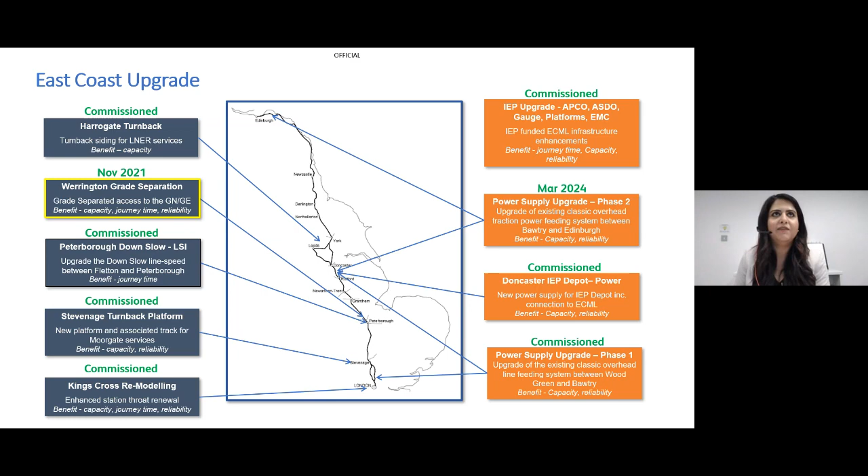Speaking about where Werrington sits within the industry, Werrington is one of the crucial schemes within the £1.2 billion East Coast Upgrade Programme. This programme also includes major schemes like King's Cross remodelling, Stevenage Turnback, and power supply upgrades on the East Coast. So the East Coast Upgrade is a major programme, and Werrington forms a crucial part of it.

Just quickly touching on what the East Coast Upgrade means in terms of outputs and outcomes for the stakeholders. So Werrington had a 9-day partial closure in January. We had a King's Cross partial closure until earlier this week, and then on Monday, King's Cross remodelling was successfully completed, with Werrington scheduled to complete in November 2021.

What that would mean as a service change for the next timetable change, as a benefit, would be 8 long-distance high-speed trains between King's Cross and Doncaster, 6 long-distance high-speed services between Doncaster and Newcastle, and the travel time between King's Cross and Edinburgh for the fastest service would be 4 hours, and between King's Cross and Leeds would be 2 hours. So lots of benefits within the East Coast Upgrade Programme itself.

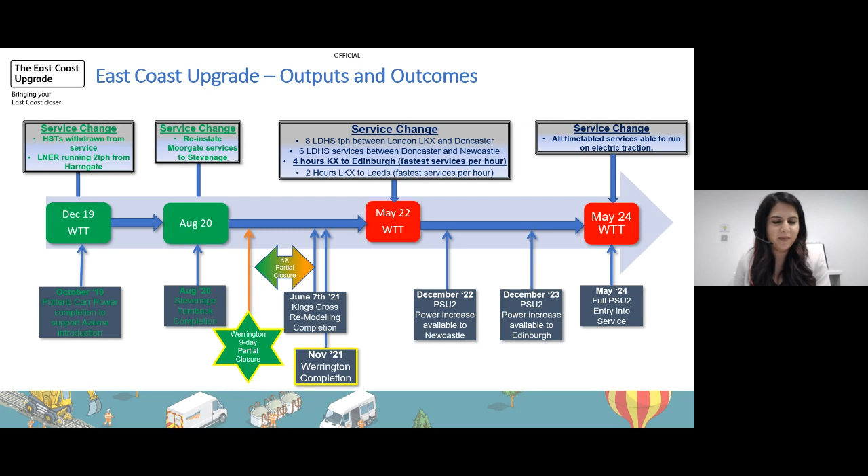If we go back to the delivery model of Werrington, the delivery model was a hub and spoke model, and what that did was drive early contractor engagement into the early design stages of the project. This was quite fundamental for us in terms of delivering the programme to budget and to schedule, but also in delivering a solution which was crucial to minimise disruption to the operational railway.

We also pride ourselves on the excellent communication we've had with the community around the project. We had monthly drop-ins, newsletters - all of this obviously pre-COVID, and even throughout COVID we've maintained our communication. Morgan Sindall have held numerous talks for school careers fairs and local interest groups.

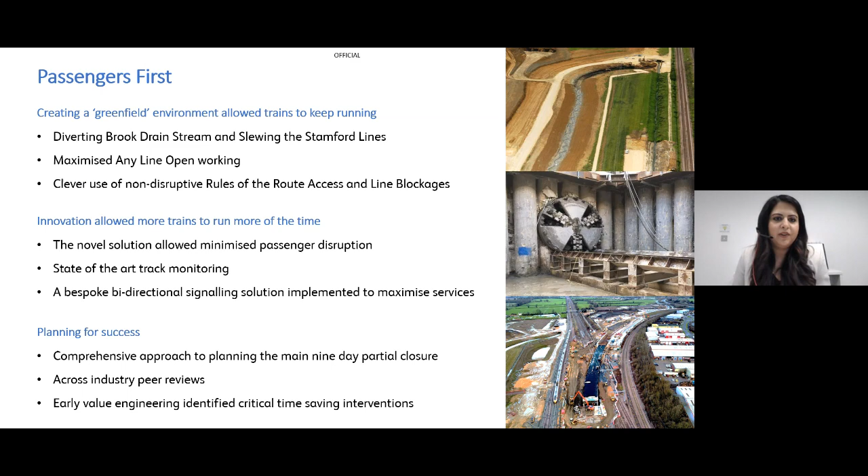In order to undertake this phase, we had to do a lot of enabling work. This bridge you see at the top is called Cock Lane Footbridge. We needed to replace an existing pedestrian footbridge with this to ensure the span was widened to allow for the new lines. We also diverted this river here, which created a biodiversity gain.

It created room for the wildlife to settle during storm surges, and we worked quite closely with the Environment Agency to ensure that this sat with their current plan.

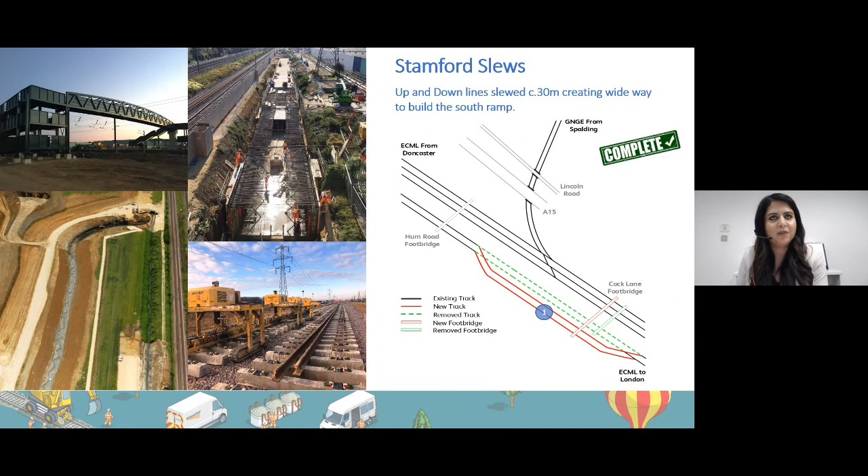Moving on to a few of the other enabling works. The north ramp was constructed by installing 183 bored piles and over 900 soil nails, finished with a sprayed concrete finish, as you can see in that image.

In total, 120,000 cubic meters of soil and clay was excavated to create this nearly a kilometre long ramp. The final fit out of this ramp is well underway and will soon be ready for track installation.

In the aerial photos, you can see a couple of bridges, so some utilities needed to be diverted. We installed a temporary footbridge to divert these utilities temporarily while we added a new span to the permanent footbridge, then diverted all the utilities onto the permanent footbridge.

And as of the weekend just gone, we've dismantled the temporary bridge, and the permanent Lincoln Road Bridge is up and running.

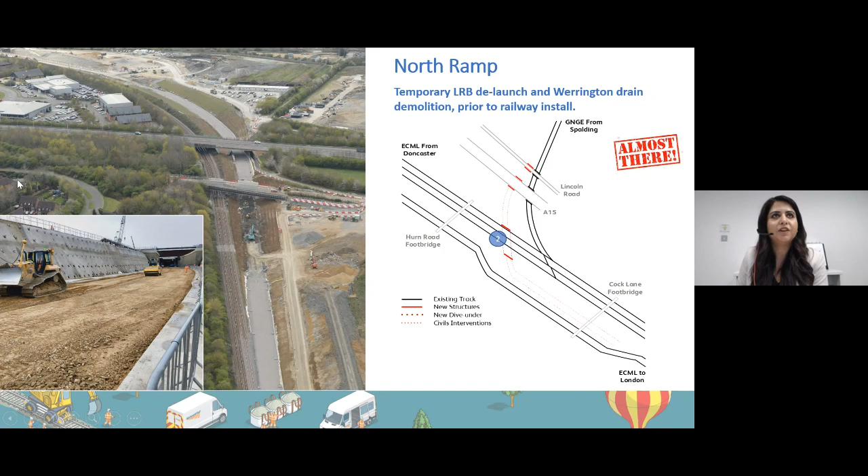Similar to the north ramp, over onto the south ramp, we created this wide way. As you can see, these lines are now slewed. We created this wide way to create this ramp. This is the bridge that I referred to earlier, and this ramp itself is also about 1 kilometre long.

It had 66 bored piles just for the reception pit itself, where the tunnels went, and 693 bored piles all the way through to the ramp, with some sheet piling here as well. So major enabling works were undertaken to ensure that the portal push would occur.

As you can see in this image, this is what the south ramp looks like - fresh bottom ballast, ready for track install.

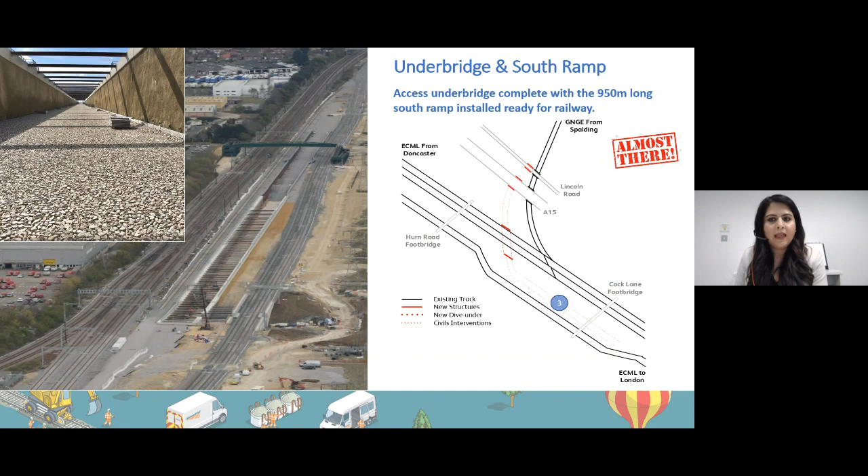And then we get to the 9-day partial closure. Before I pass it on to Brian, I'd like to quickly touch on the bi-directional signalling system that I mentioned earlier.

This photo does quite a lot of justice to what that meant, because this is where the portal is nearly in its final position. You've still got a long reach excavator undertaking those excavations, but you actually see an East Coast mainline train running, all due to the bi-directional signalling system that we installed. That was quite a success for the project.

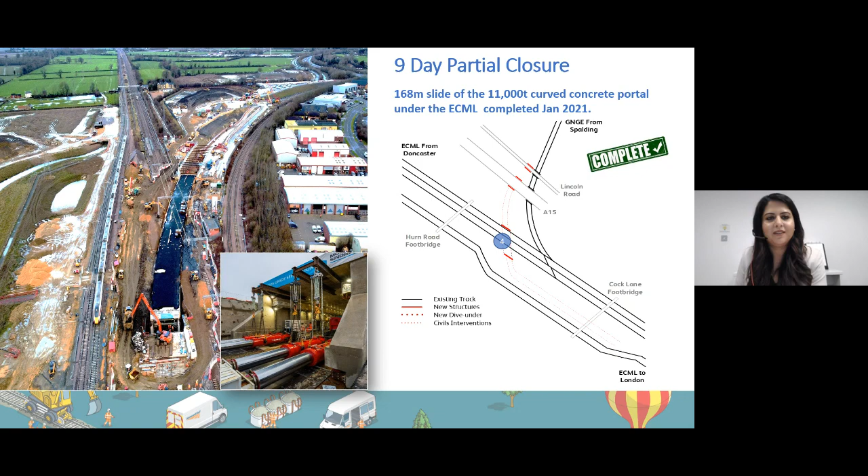I'll hand over to you, Brian, now to go through what the 9-day partial closure was all about.

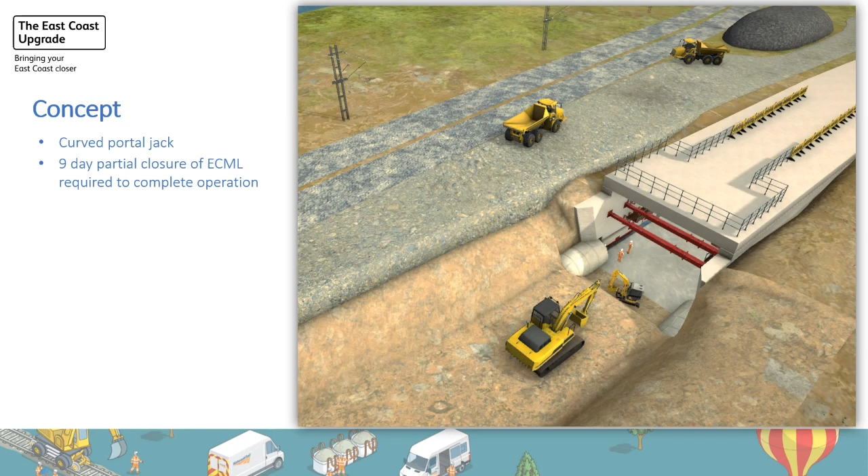It involved 2 guide tunnels, put in ahead while the East Coast Main Line was running, and a jacking slab was constructed on the launch side. A cutting head was put on the front of the portal, and we set up at the back with some jacking operations to push the portal through.

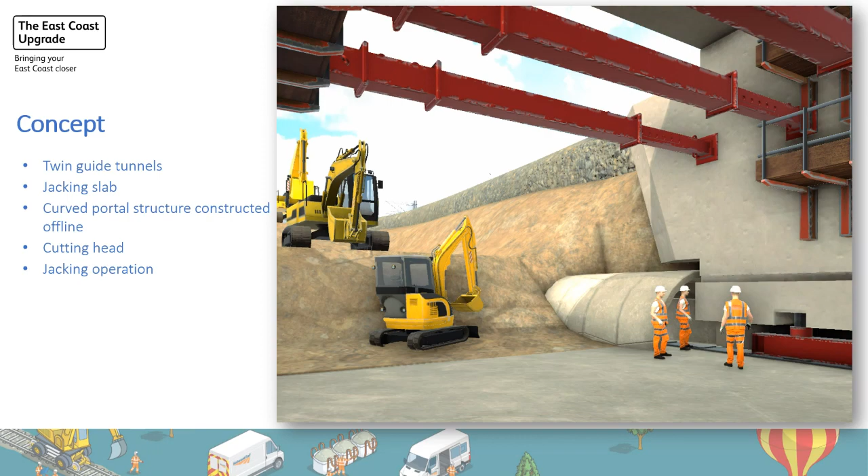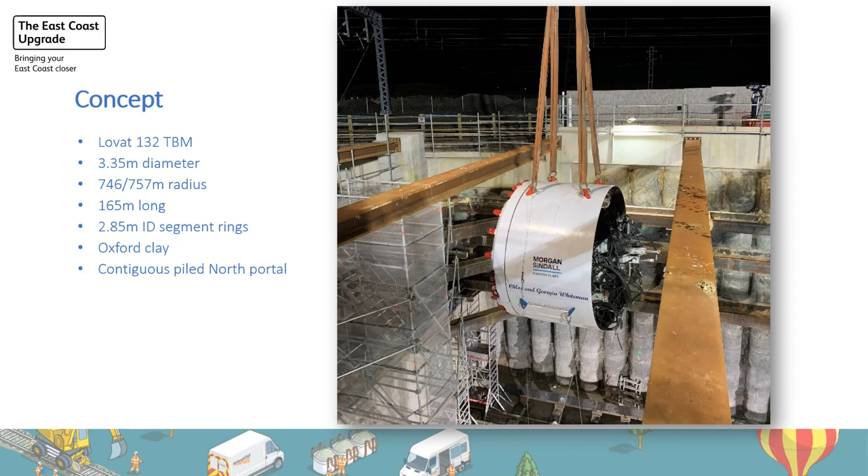The next slide shows a picture of the inside of the tunnel, ready for the slide track to be fitted. It's a bit tight for space, but you can see the curvature of the tunnel ahead.

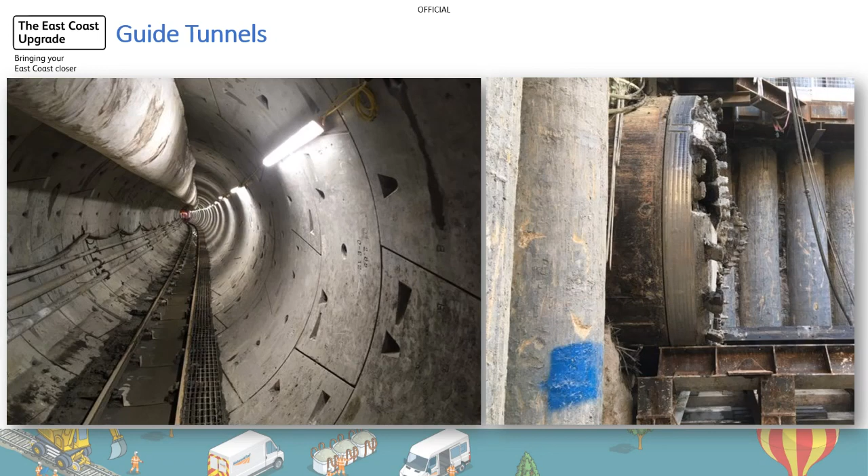Going down to the next one, the portal construction was built offline. It was built on a jacking slab that was both foundation for the structure in its temporary state, but also acted as the reaction slab for the jacking operations themselves, and took all the thrust loads. There are piles underneath it as well to help transfer the thrust loads to the ground.

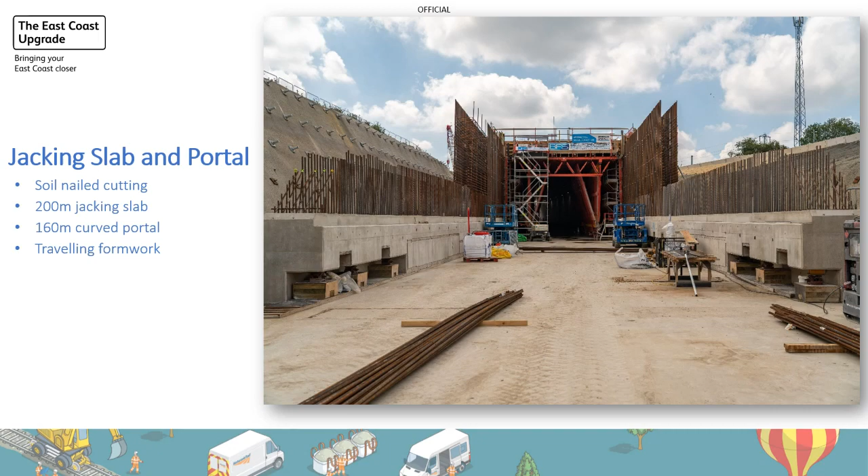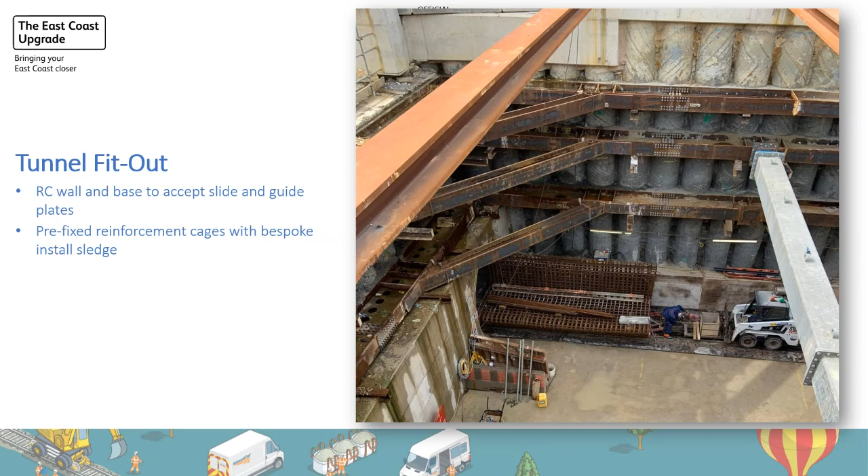And then the tunnelling itself was fitted out with a reinforcement cage, both a base and a guide wall. This was prefabricated on site, but away from the tunnel, and lowered down into the tunnel, then pushed into place.

Through the tunnel and concreted in place. On top of that, there was fixed a steel plate to take the PTFE pads, which were the slide medium, and also a guide plate on the wall, which acted as the steering plate for the pushing and guidance system, to help the portal go around the curve.

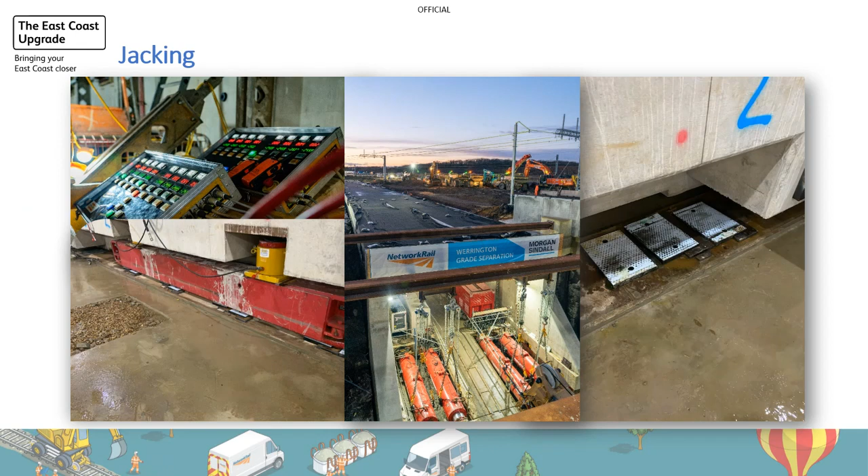Once that was fitted, the portal itself was fitted with a series of jacking equipment. That was really in three parts. There was a lift system and a skid shoe system - you can see a red beam underneath the portal, and that's got lift jacks on it to allow the load of the portal to be transferred onto the skid system.

PTFE pads underneath that, and it's a stainless steel underside to the skid beam. There was also a guidance system that steered and kept the structure central within the guide walls. And then lastly, there were 4 propulsion jacks at the rear of the structure, 1,250 tons each, 3-meter stroke jacks that pushed the whole system along sequentially.

In the partial closure, it relied on us digging ahead and staying ahead of the jacking system. So we had to shift 11,000 tons worth of earth out in front of the portal. The OLE was raised to give the excavators space to work, and the new OLE equipment was designed with a 5-meter non-effective depth of OLE, to allow loss of material and passive resistance around the piles themselves.

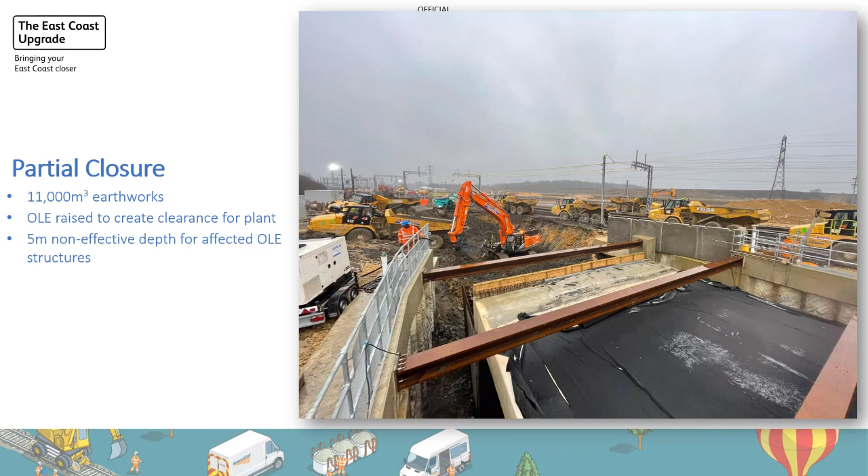So it's a fully integrated design solution. In the portal, during partial closure, we had a crane at the back handling the jacking frames. We had the propulsion jacks at the back - all of that hung off the back of the portal.

We had some framing just at the front as the excavation got deeper, which we had to get ourselves in a position to work under - a fairly rehearsed construction method.

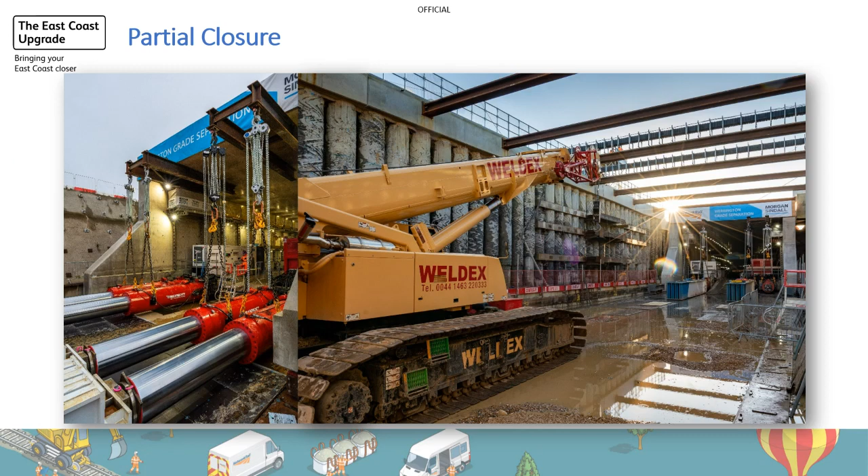At the front of the portal, the box was fitted with a cutting head that cut the soil at the side. A 50-ton excavator at the front kept the earthworks ahead, and we had a smaller excavator at the front just handling the segments of the tunnel.

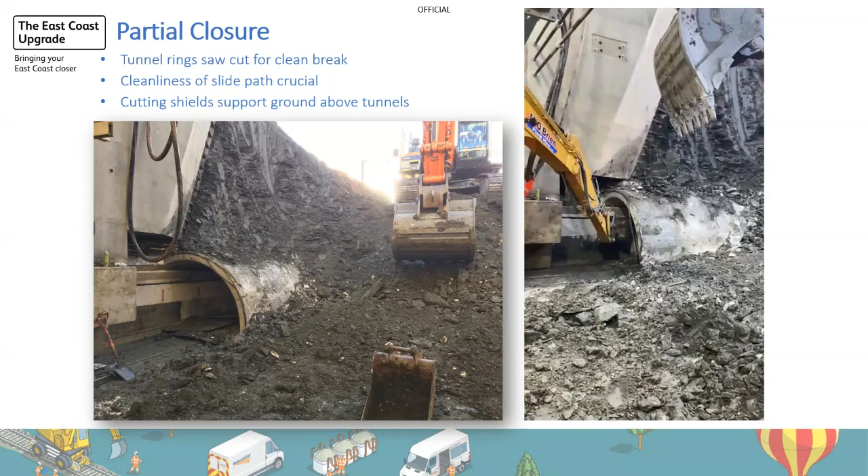The tunnel itself was pre-cut prior to the possession to allow us to lift out the segments as we went. In terms of the closure itself: we took possession on the Friday, late PM, and the track and OLE were out by Saturday. The jacking operation and structure was pushed into place by the Thursday, with a handover to track late Friday, and then track handed back with everything in, trains running Monday morning as planned. So, very smooth delivery.

And we have a video next, so I'm hoping that will play. That's playing - I can't see it on my screen. It's playing, yes. I don't know if there's music, but I'm sure we can live without the Network Rail official music. Yeah, that was it in action.

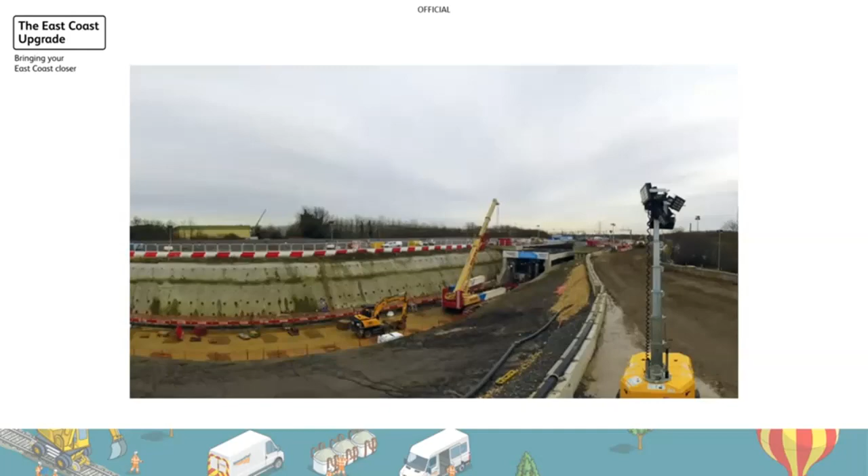And in terms of lessons learned, what went well: the planning and pre-planning methodology, peer reviewing, having experienced people involved.

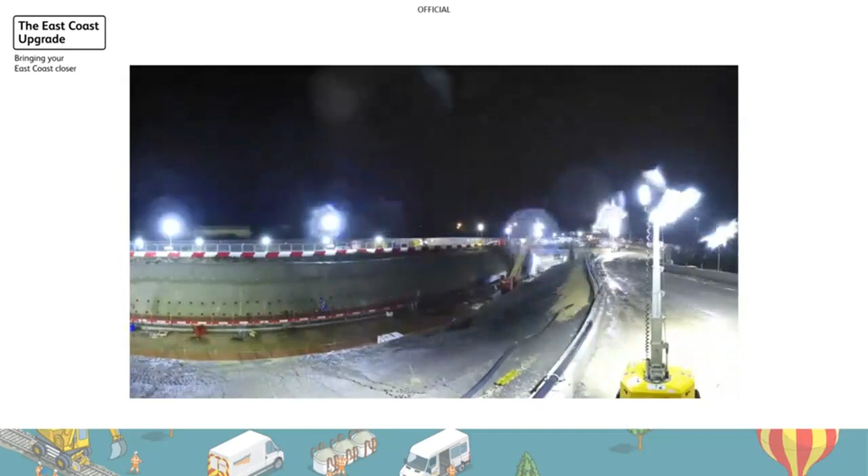Oh, we've got more video by the looks of it. That went really well.

We trial pushed the portal 21 meters, and we excavated out ahead of the portal pre-possession, just to get as close to the railway as we could.

Communication and reporting in the blockade was very good. We had the program broken down into individual elements that fitted into the reporting cycles, and we also live revised the program during the blockade.

And the installation of the bi-directional working really kept the lines open and allowed Network Rail to run services during the portal push as well.

In terms of challenges that we had on the day, as it were, weather conditions were appalling - it snowed, it was very wet.

Pre-blockade, we had to deal with COVID-19 restrictions that caused a bit of a delay to the tunnelling, but we got to the January possession on time. We also had a challenge with the PTFE pads, where we had a supply issue, so we were able to swap the PTFE pad system for Mammoet's standard PTFE pads. We dragged those in from all over the world and were able to use them in the blockade to keep things on track.

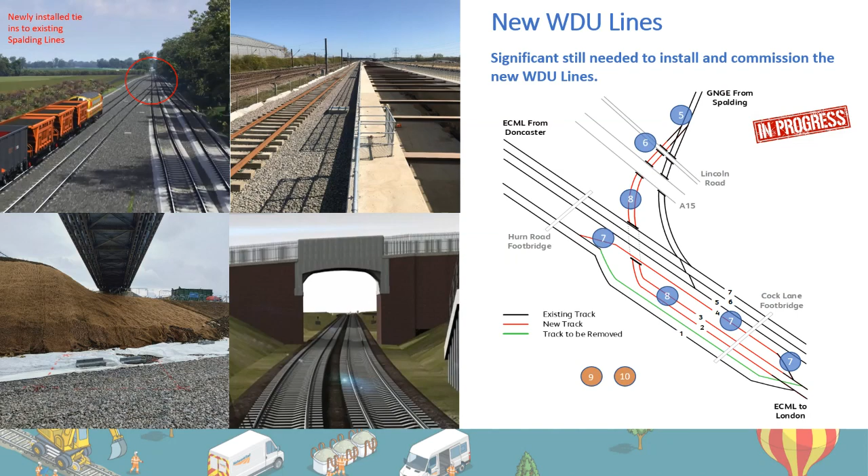Thanks, Jonathan. So as Brian mentioned, the 9-day partial closure in itself had a lot of moving parts and elements, but a lot of planning went into place for us to ensure that we were able to deliver the entire stage within the planned 9 days and be able to hand back on time.

But that wasn't the end of it. There is still work to do to ensure the new lines can be put into operation and entered into service. If you can see on this diagram, essentially lines 2 and 3 are the new dive under lines. What we've completed so far is a slew of the Spalding lines here, and as of the weekend just gone, we have slewed this green line back into what will be its permanent position.

Which is number 4. The dive under lines will now be, as the ramps are nearly ready, and so is the box for us to install track, which will be done in the next 5 weeks within the dive under lines. We've also completed the tie-ins for the permanent Spalding lines here, and we just need to finish the tie-ins for the dive under lines.

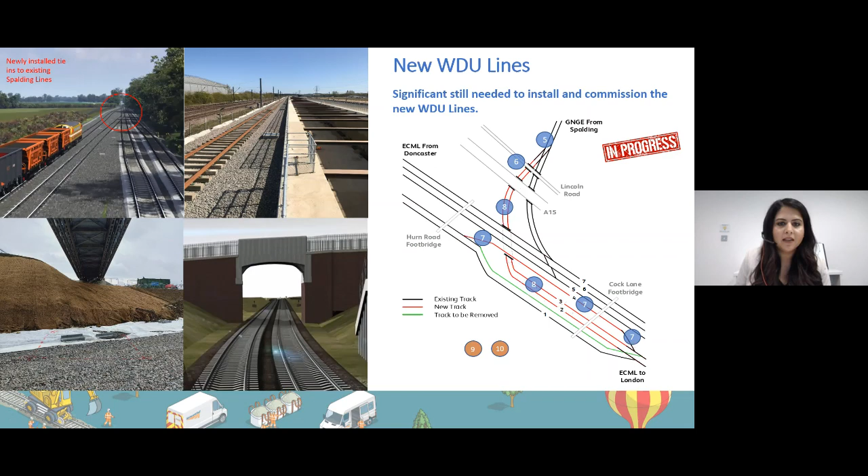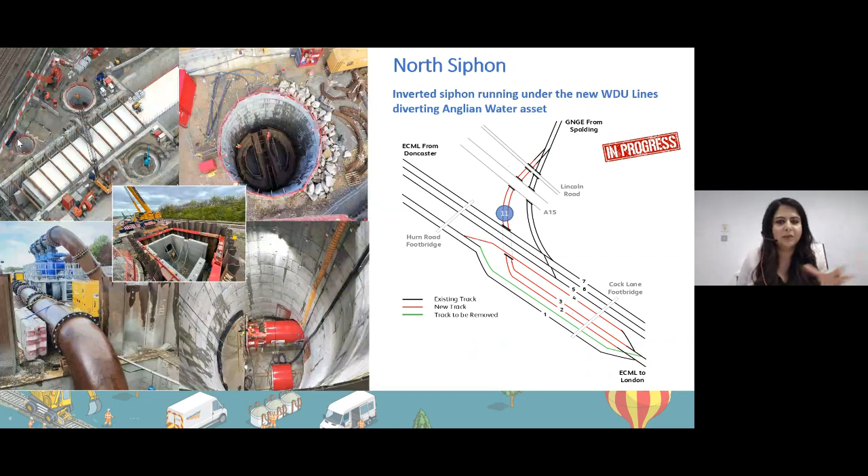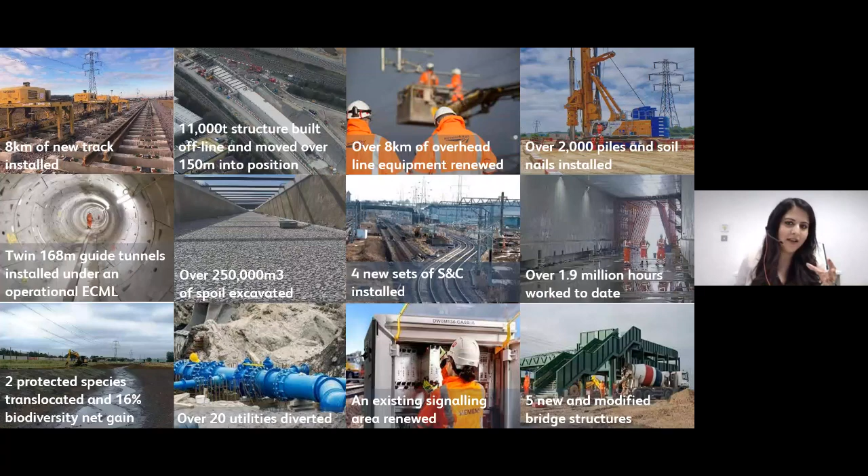We have had a lot of spoil excavated, 250,000 cubic meters to be exact, 4 new sets of S&C, and nearly 2 million hours worked to date. That doesn't include the initial optioneering of the project. If that were included, I believe it's close to 6 million.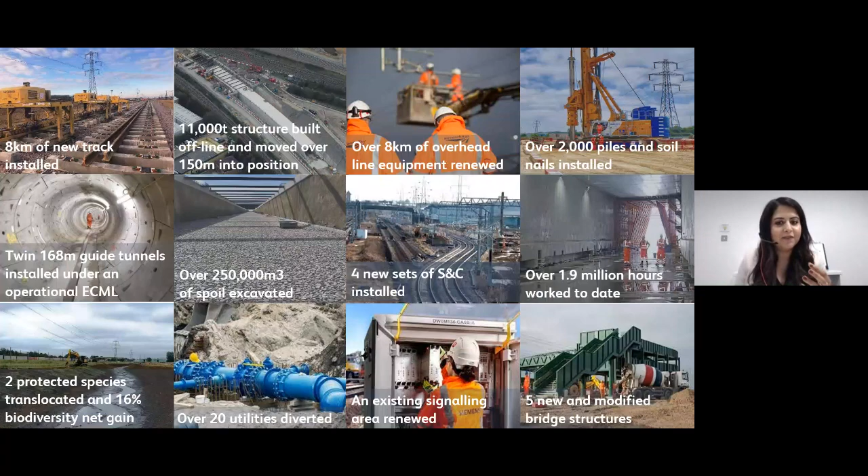2 protected species were translocated, and we've actually managed to get a 16% gain on biodiversity. We've diverted 20 utilities, and I see there's a question about utilities, so we can get to that in a second. We've renewed an existing signalling area, and we've modified 5 bridge structures. So apart from just creating a new dive under, we've also done a lot of work to ensure that is enabled.

To conclude, this was what the site looked like on the morning when we opened up. As Brian mentioned, it was snowing and it was very difficult. However, it made for a really great picturesque finish. And as you can see, the portal is in place now. We've reinstated the East Coast Mainline, and there's a train going over what is now the newly installed portal.

So that's the end of the presentation. I'm happy to answer any questions.

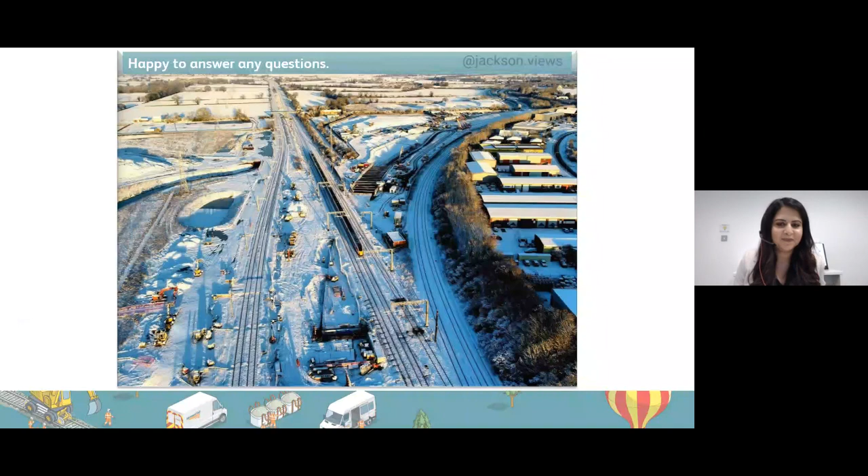That's fantastic. Anshel and Brian, thank you very much for giving up your time to come and speak to us about this. This is really interesting for us. This is classic railway civil engineering.

As a graduate 21 years ago, I worked up in York on a scheme called Peterborough Area Remodelling Scheme. And the plan in those days was to actually drop the fast lines of the East Coast Main Line down into a dive under slightly south of where you are, and have the slow lines and the freight routes cross over the top. Sadly, I think Railtrack going into administration put a kibosh on that, and so 21 years later, it's good to see the scheme that actually happened.

Your loss is our gain, Jonathan. So thank you very much. Yes, yeah, no, that's true. That's true. I didn't get the experience of that, but at least I get to hear about it now, and I get to see the end result.

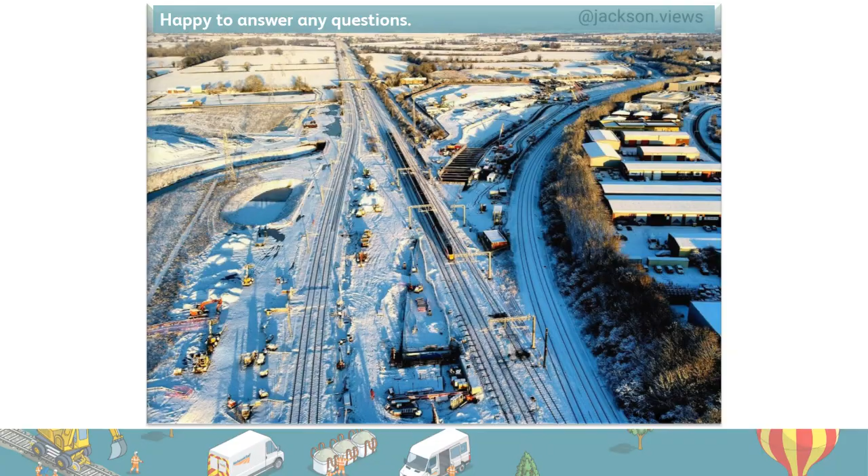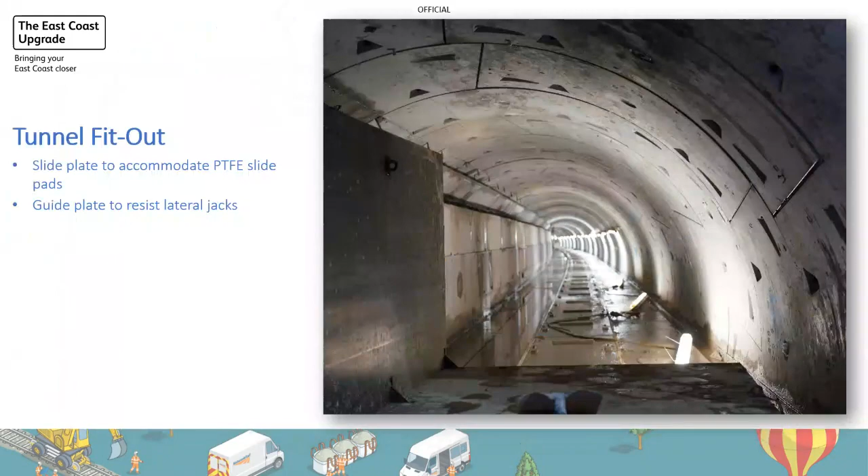Yeah, if you bear with me a second, I'll go back to where we had the bidirectional photo. That's great. Apologies, I've had to... Yeah, we can see it scrolling through the pages.

The panels are being recovered as we speak. So was that the non-electrified line? Because I know the down Stamford is also the down slow, isn't it, and that's electrified. So was it the non-electrified line that you used bidirectionally, or? I believe it was electrified, but I am perhaps not the best person to answer that question, Jonathan. But I do believe both the Stamford lines were electrified in order for us to slew them in the first place, so you could use electric trains. You didn't have to use the hybrid diesel engines to get through there then.

Yeah, so I've deviated from David's question, which was roughly how much does the bi-die signalling cost? That's another good question, David, that I may have to come back to. I have consulted some experts, but since this was delivered within the scope of the project itself, but sort of outside the remit of the main works, it's not something I'd be able to comment on yet. However, I'm hoping that by the end of the questions I have an answer for you. Thank you very much, that's much appreciated.